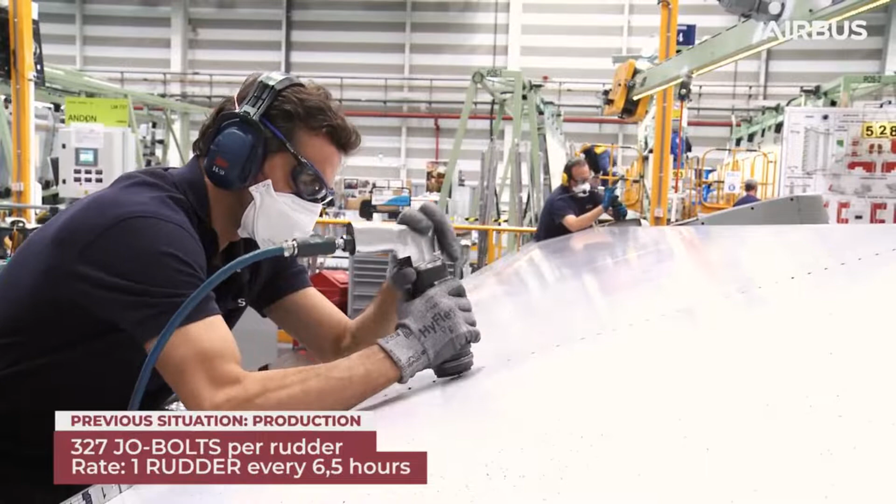Initially, technicians had to shave the rivets of the rudders manually. It took a lot of energy and time for a very repetitive action. This specific action can be automated by robots to let technicians do other actions with more added value.

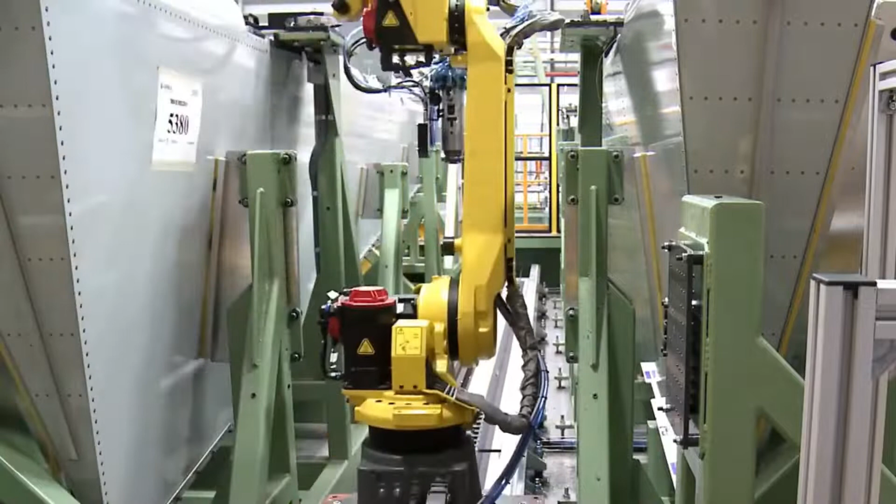That's how RoboShave was born. This 7-axis robot is dedicated to shave rivets on rudders in an automatic way and autonomously. The main components are the shaving tool, and the sensor to ensure that all shaved rivets meet the required compliancy.

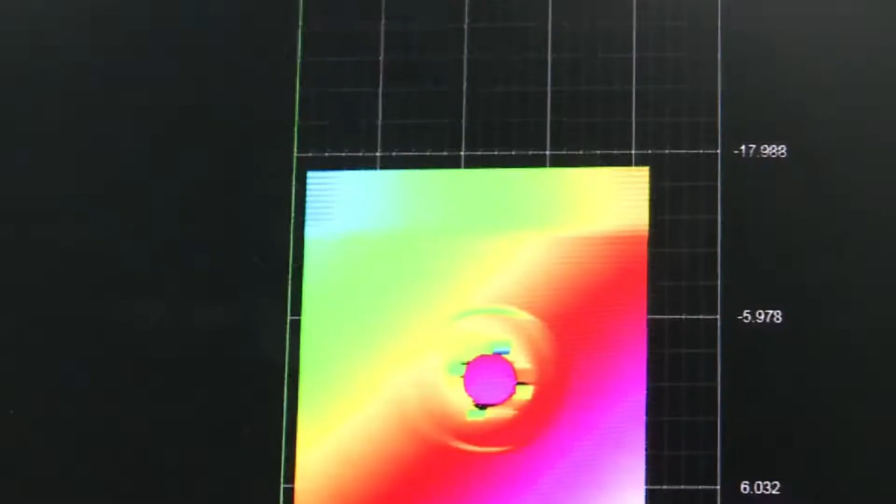In another part of the assembly line, some other technicians have the responsibility to verify some parts of the plane with a specific industrial tool called gap gun.

Initially, the data had to be raised manually to the corporate area. With the merging of IT and OT environments, Airbus Spain decided to connect their industries to a common area to aggregate the data, to transform them into business opportunities.

Thanks to this interconnection, the results of the gap gun can be automatically raised into the corporate network. It is also possible to push information into these devices, for update purposes for example.

Because all industries are involved in this global grouping strategy, this interconnection is also available for RoboShave to get the data in a real-time way.

In this project, in order to reach the main goal of building the factory of the future, Airbus decided to create digital twins of the existing models. It means a digitized copy of the physical factory with the same systems inside.

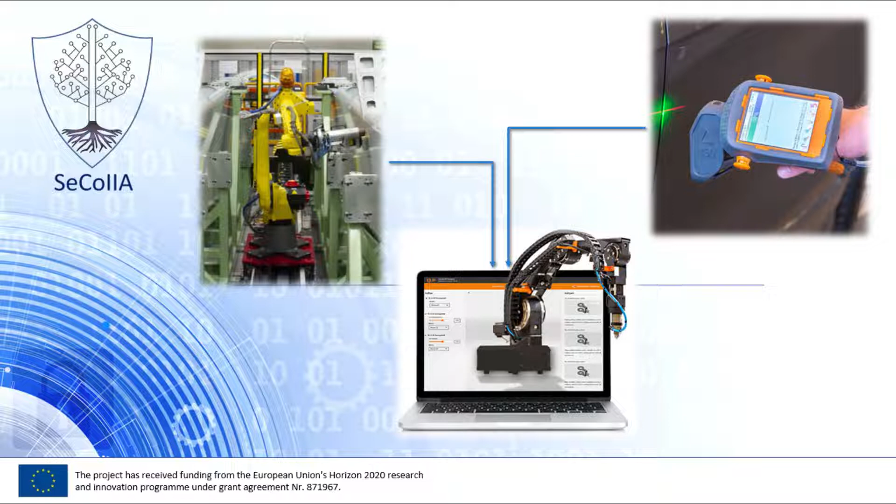This solution can have multiple advantages: the possibility to train people, doing cyber and pre-production tests, or process demonstrations of specific events for awareness. Another one is the availability provided, because the physical twin can be busy for any reason, like production or maintenance operations.

Finally, the possibility to restore the environment at any time, and without safety and cost consequences, creates a great flexibility for all actors working close or far from the system.

In order to build these digital twins, the integrators used a tool called Airbus CyberRange. It is an advanced simulation platform that can be used to model IT and OT systems composed of various types of machines.

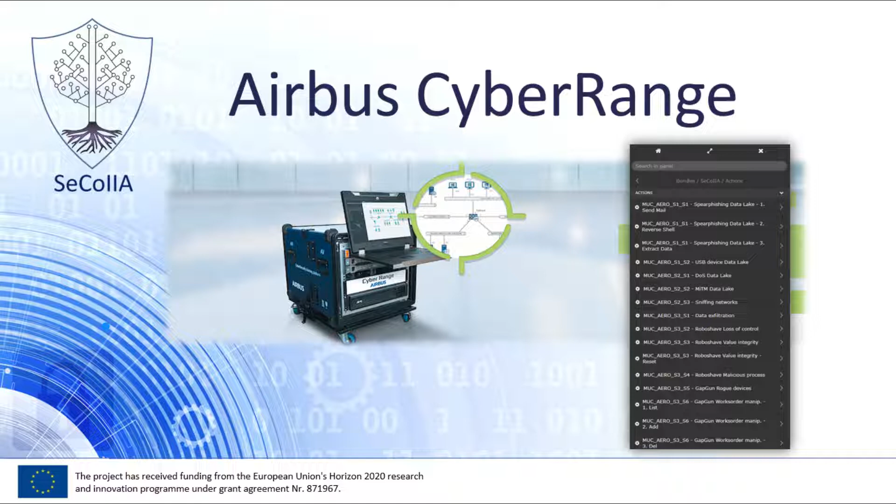It also has the ability to apply realistic scenarios, like replaying existing cyber attacks available in the wild, or playing specific built-in ones for the concerned topology. Every operation is done in isolated work zones.

Let's go further in the presentation of the simulated models. The RoboShave digital twin provides the possibility to show in real time the current position of the robot in its workspace. It is also the case for the HMI normally used by real operators.

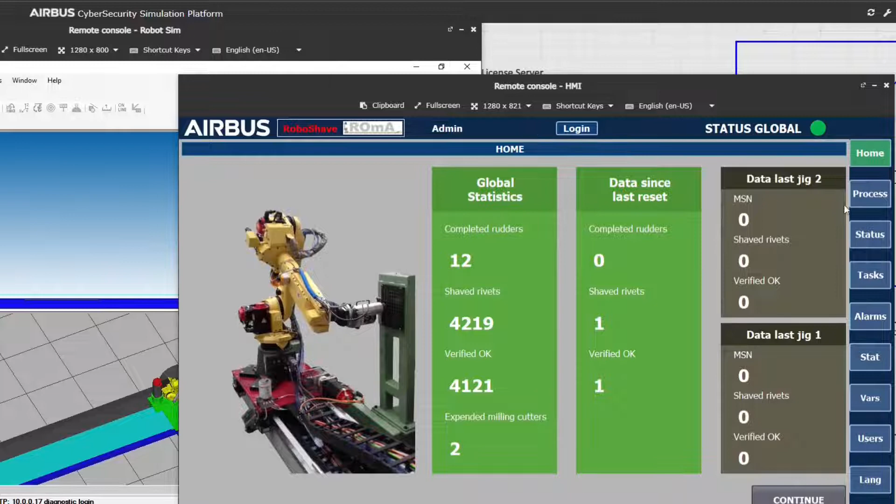On this view, we can see the technician launching a shaving process by selecting rivets. Afterwards, the test coupon process is launched to test the tool and the sensor of the robot.

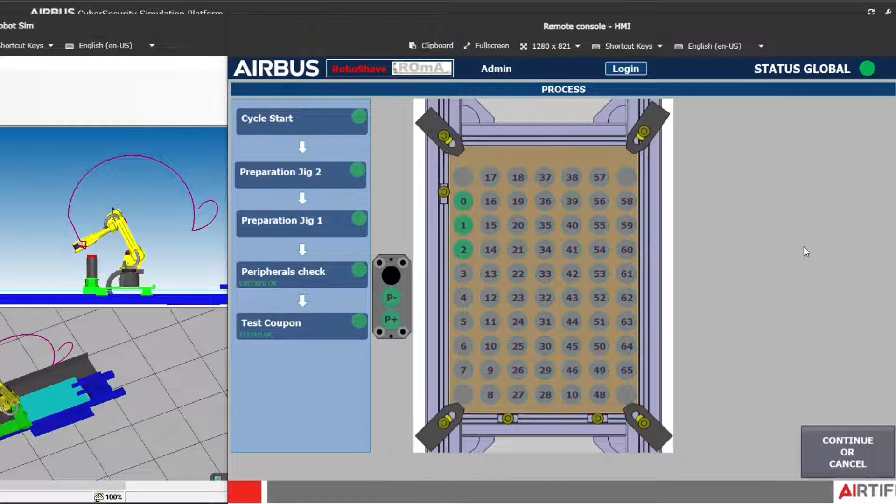This is possible by a communication between components like on the physical twin. The results of this operation can be simulated to trigger specific events like failure of the scanner, or success of the shaving tool. The process is now started for hours, like the real one.

Thanks to the simulation, it is also possible to manipulate the output again. For this example, everything turned out fine.

The second model is based on the gap gun tool. It is dedicated to scan complex shapes with high precision for industrial usages. On the physical twin, the tools are interconnected to a corporate network to raise industrial data.

and convert them into business data. It's also possible to launch different services, like getting the current connected gap gun on the industrial network, in a remote way.

Another service available is listing the work orders of a gap gun. A work order is a plan built by specific technicians to provide an easy use of the tool for on-site operators. Every scan will be saved and compared with tolerance values to determine if the piece is compliant or not.

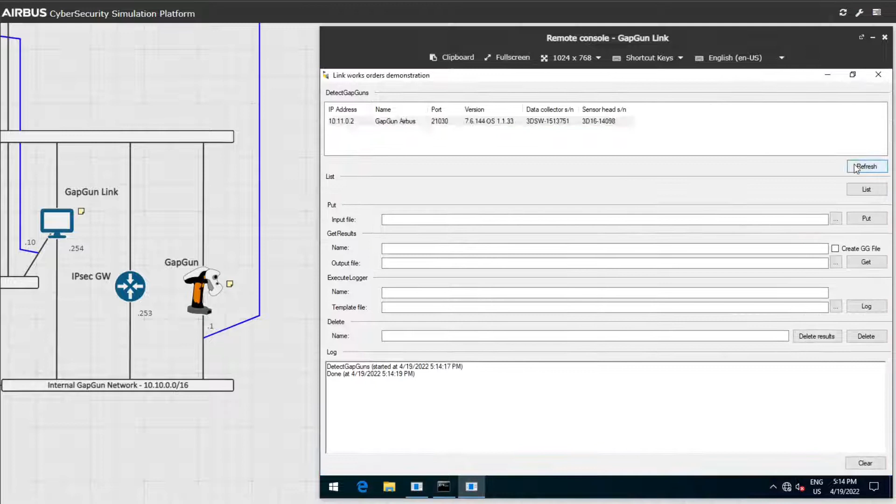It is also possible to load a work order into the virtualized gap gun. To do that, the software from the manufacturer is used. As an example, we will push the original work order from Airbus into the gap gun.

To verify if this operation succeeds, a new listing action is performed. To finish the test, we perform a delete operation to suppress this works order just uploaded, and verify it by listing the works orders again.

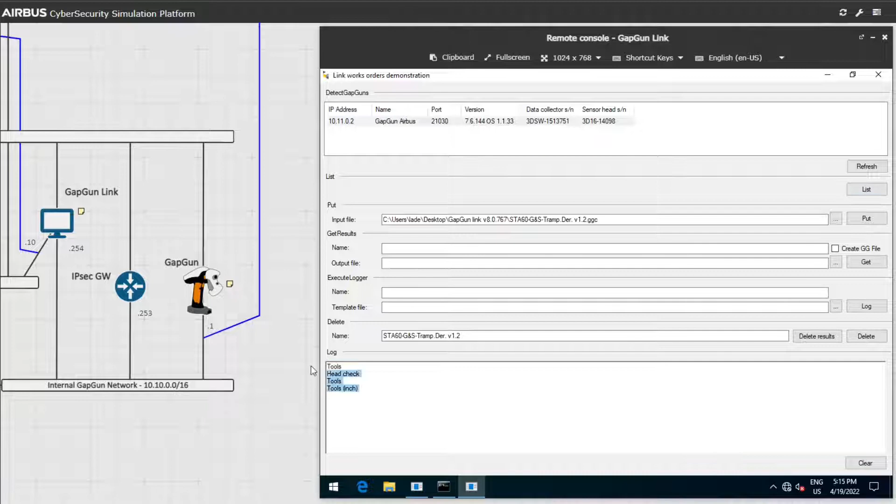After a research phase of how to build the different systems according to simulation constraints, some attacks have been implemented, endemic to these specific environments.

The first attack is called Crazy Robot, and consists of launching illegitimate requests to the robot by manipulating all components on the network.

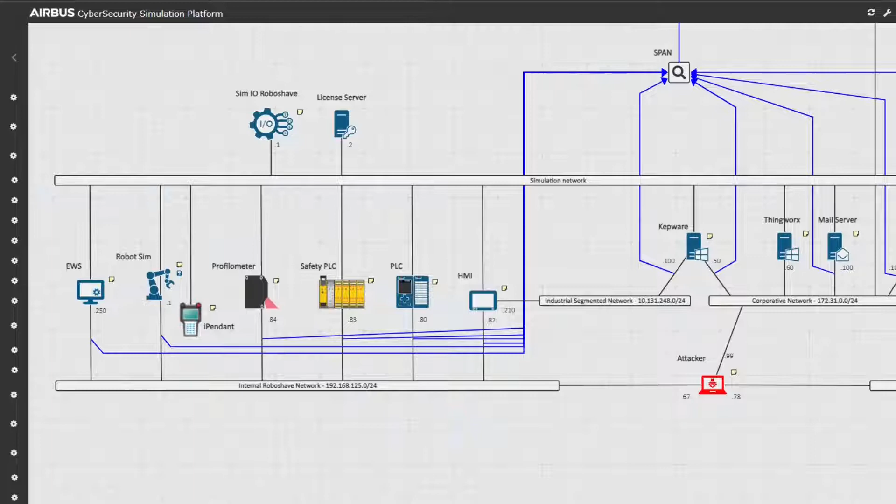For this attack, everything is already configured in the cyber range, and the attacker just needs to launch the operation from the menu.

From now, everything you see on the HMI is done by the attack without human manipulation. Imagine seeing the operator panel moving by itself on the real shop floor. It would be a surprising event.

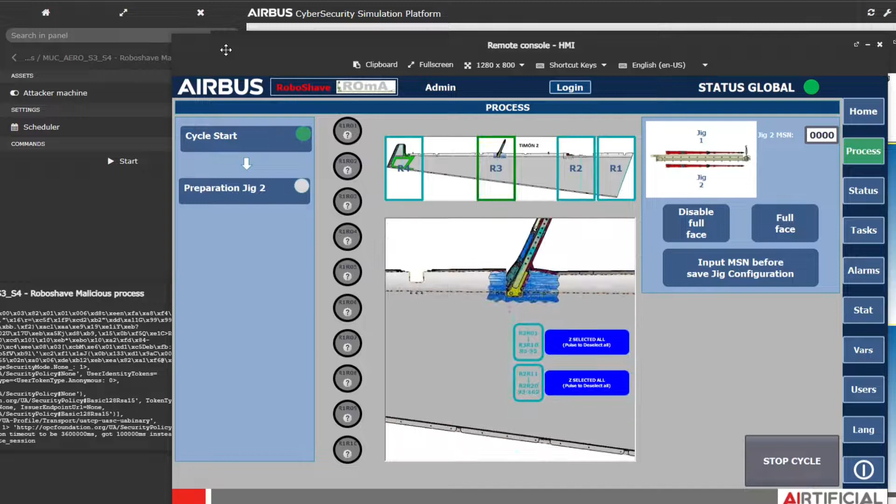The attacker can use this attack for multiple purposes, like disrupting a current shaving process, triggering an operation when a technician is in the dangerous zone, or degrading the components.

To perform this attack, it is needed to have specific knowledge related to ICS environments, and particularly OT protocols. This type of attack is often associated with state actors or competitors in the same market.

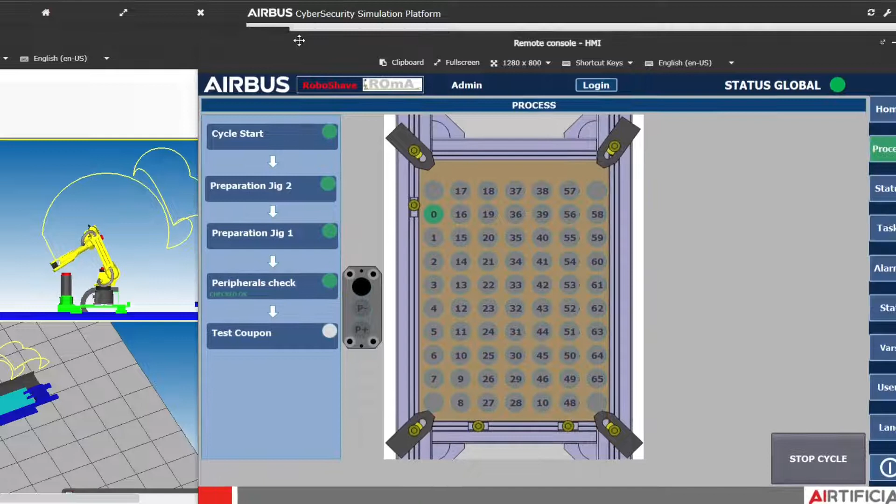These visible attacks are done after weeks, months, even years of being stealth in the company's networks to gather the maximum amount of data, and then to establish a strategy to reach the main goal of this specific threat group.

In order to protect the industrial process, it is necessary to have means deployed to detect, assign, and answer against all threats.

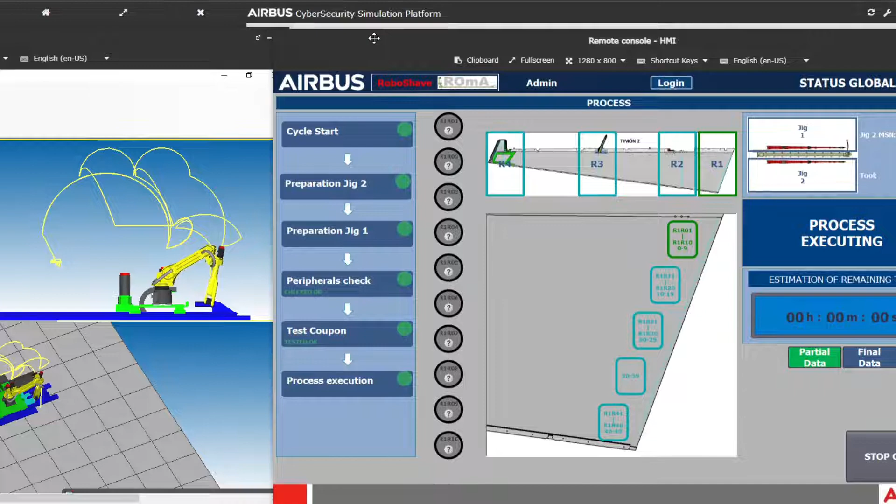The other attack available on this demonstration is called Phish and Steal. It is decomposed into multiple parts.

The first one is sending an email with a corporate shape to persuade the user to follow the instructions inside, launching a malicious executable. This targeted attack is called spear phishing.

This is one example of how an attacker can reach internal users and create a first entry point. This can also be done by using social engineering or even exploiting vulnerabilities on specific devices.

During the time that the user launched the malicious file, the attacker is waiting and so receiving the reverse shell connection.

From this moment, the attacker can do what he wants. At this step, the attacker pushes a tool on the victim's machine to extract all saved credentials on the disk and in the memory.

We can see the saved credentials on Chrome used to connect to the corporate interface, ThingWorx.

The second step consists of using these stolen credentials to interact with ThingWorx, and so launching illegitimate commands. On the script used, we can see the attacker listing the different configurations available on ThingWorx, and specifically the ones used by Airbus.

By crossing the data with the Airbus project, we identify the specific configurations for RoboShave and Gap Gun. The attacker can do what he wants with them.

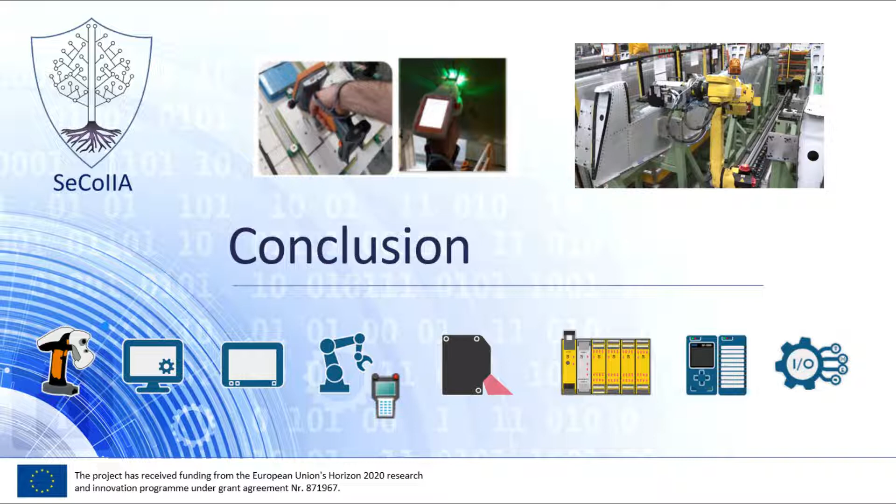In Airbus Cyber Range environment, a realistic simulation has been built. Also, besides the digital twin implementations, different attacks were integrated to show the risks related to industrial cybersecurity.

Also, a collaborative security operations center was created and allows multiple cyber actors to handle the detected attacks to multiple services and tools with specific area of expertise for each.

The world of industrial control systems is evolving, and all of these presented elements are participating to render the industry of the future in a concrete usage to improve security and safety in the production environments.

To go further, these solutions need to be integrated in the factories with the close collaboration of on-site teams, with awareness, skill transfers, and communication.